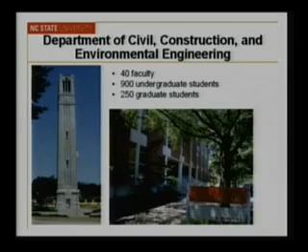I'm going to talk about a specific area of research today, but I just wanted to mention that we're doing a lot of energy and environmental related research that I'm not going to go into detail on today. I might give some examples, however. As Alberto mentioned, I've done a lot of work on measurement and modeling of the activity, fuel use, and emissions of on-road and non-road vehicles using portable emission measurement systems. I've done a lot of work on modeling and evaluation of advanced power generation and environmental control technologies. Of course, one area of current interest there would be mercury emissions. Another, of course, would be carbon capture and what to do with carbon coming out of fossil combustion systems.

I've done a lot of work on quantifying uncertainty in emission inventories. We've been doing work on life cycle inventory and energy mix modeling of various energy systems, including looking at alternative fuels. I've done a lot of work in environmental exposure and risk assessment, and also various systems methods of dealing with variability, uncertainty, sensitivity analysis, and optimization in environmental problems.

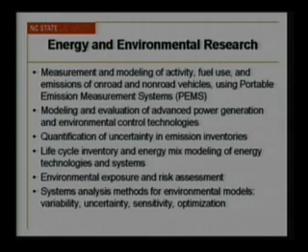Just as an example of some of the field work that we do with portable emission measurement systems, and this will tie into some of what I'll talk about with the best practices for greenhouse gas emission reduction, is to instrument vehicles during actual operations in the real world to measure their activity, their fuel use, and their emissions.

And this is an example where we are instrumenting a bulldozer, and we've tested several bulldozers and lots of other vehicles, with a portable emission measurement system that has gas analyzers and a light scattering particulate analyzer. It draws power from a battery. We instrument the engine to measure things like engine RPM, manifold absolute pressure, intake air temperature, and then that's used to calculate with the exhaust data the fuel and airflow through the engine. We have a GPS receiver to quantify the spatial activity.

And so we've used this for a lot of different kinds of vehicles. We've developed a number of different methodologies for different kinds of vehicles over the last 8 years. And in recent work, we've been looking at biofuels, additives, comparing different engine certification tiers to see how effective they are in the real world, comparing different types of vehicles, and so on.

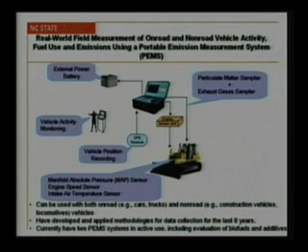Some other research related to that is we've done a lot of work on modeling of real-world vehicle emissions. For example, developing microscale and modal models of emissions to have high resolution in space and time of vehicle fuel use and emissions. And some of these other points I've already mentioned.

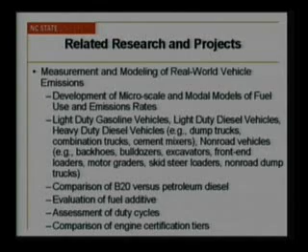Some other work that we're doing, and I'll show some examples of this in the presentation, is we're looking at auxiliary power units for long-haul sleeper cab freight trucks, which is the first bullet here. We're doing a project that's sponsored by the US EPA, but it's in collaboration with Volvo, which has their technical center in Greensboro, North Carolina, to instrument and quantify the activity of a fleet of 20 in-use long-haul sleeper cab trucks to get an idea about the extended idling that occurs with these trucks during driver rest stops.

And these trucks are all equipped with an auxiliary power unit system. And so we're quantifying the way the drivers use those systems. They use shore power. They use the engine for idling to supply hotel services to the cab of the truck. And so I'll mention that as one of the examples of what different practices might be that could reduce greenhouse gas emissions. We're also doing some work that I won't talk much about on the effect of land use on mobile source emissions, but this may be of interest to some of you.

And as I mentioned, we're doing some life cycle inventory modeling to look at sort of the carbon intensity of alternative fuels and the overall emissions of the fuel cycle and the tailpipe emissions for particularly biodiesel, ethanol, and electric vehicles. We're also doing some work to support near roadway air quality studies, looking at how do you estimate emissions at very high temporal and spatial resolution, which is not really part of the capability of the typical emission factor models.

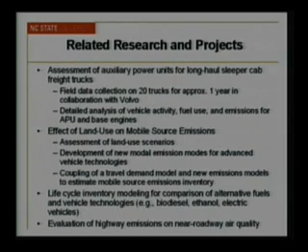Just very briefly, I'll mention another area we do a lot of work in, which is process simulation modeling of power generation systems. And this is an example called the Integrated Environmental Control Model. If you do a web search for that name, you'll find a website where you can download this model. This model is developed primarily at Carnegie Mellon University, where I did my graduate work. And since I've been at NC State, I've continued to contribute some of the components of this model, including the modeling, for example, of gas turbine systems.

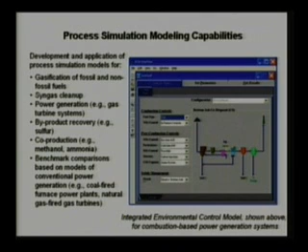And so this has the capability to model a variety of gasification and combustion of fossil as well as some non-fossil fuels, and to look at gas cleanup, byproduct recovery, and some other things. Also in some other work, we've looked at byproduct recovery, co-production, say, of transportation fuels, and various kinds of comparisons. There's also a version of this particular model that deals with carbon capture, and that may be of some interest.

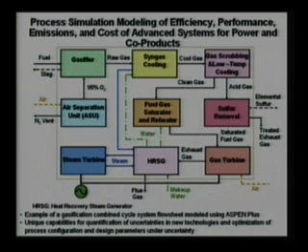This is another type of modeling environment for looking at advanced power generation systems based on gasification. This is a flow diagram of Aspen Plus chemical process simulation model that we use to quantify the performance, emissions, and cost of these types of systems. So we've done a lot of work looking at gasification-based technologies. And of course, gasification can be used with a variety of fuels ranging from coal, but also solid waste, heavy residual waste from refining, and other kinds of waste fuels. So it's a very flexible technique and probably more amenable to carbon capture than combustion systems.

But having said all that, what I'm really going to focus on today is related to greenhouse gas emissions from freight transportation, looking at identifying, characterizing potential best practices. And I want to stress the word potential because I'm not going to repeat that word every time I talk about best practices. But what we've done here is essentially identify almost 60 potential best practices to reduce greenhouse gas emissions in freight transport. And we've done kind of a generic best estimate assessment of each one.

Now, because I do a lot of uncertainty analysis and so on, I'm fully aware that there's a lot of variability in how these practices would perform for particular vehicle owners or fleet owners. And so there would be site-specific issues that would need to be considered in a more detailed assessment. But one of the motivations for this work is that it did not appear that there was any systematic comparison or even listing of these best practices.

And so I think some of the value of this is to have one compilation of these on at least a consistent basis. And as I'll talk about at the end, I think there's some ways this could be refined and improved to make it maybe more amenable to individual users who might want to make decisions at a vehicle level or a fleet level or maybe even a state government level.

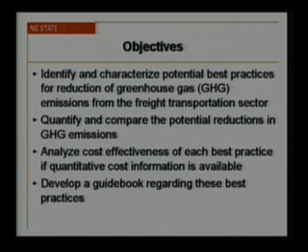Okay, so I'm going to talk about a lot of things. Some of them won't take a lot of time to discuss. So I'm going to define a few key concepts, talk about our overall methodology. I'll give a list of the best practices, and as you can imagine in an hour-long seminar, I'm not going to be able to go into detail on 59 individual best practices.

So I apologize if I don't cover your favorite one in the talk, but there is a report available, and I'll give you the link for that toward the end with more detail. And I'd certainly be glad to have follow-up discussions with anyone who wants to contact me by email for more information.

I'll talk about, on a modal basis, what the potential greenhouse emission reductions might be if these best practices are implemented, perhaps very aggressively, as an upper bound on what we might expect the benefit could be, recognizing that there are all kinds of realities, of the feasibility and logistics of implementing, that would need to be considered in more detail in a second step beyond this assessment.

We'll do some comparison of costs and cost effectiveness of various best practices. And a key point there is some of them will actually save money, and some of them might cost some money but provide a lot of benefit in terms of greenhouse gas reduction. So it's sort of a classic situation of, where would it make sense for a government to step in and provide incentives for things that the market otherwise wouldn't be adopting.

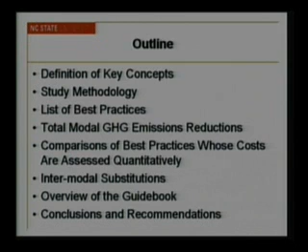Okay, so kind of at the big picture level, if we look at greenhouse gas emissions in the U.S. in terms of tons of carbon dioxide equivalent, the U.S. is emitting on the order of about 8 billion tons of CO2 equivalent per year. And the freight transportation sector is just a little under 10% of that, so on the order of 700 or 800 million tons per year of CO2 equivalent. So it's a non-negligible part of the total, and in an absolute scale, it's a fairly large amount of greenhouse gas emissions.

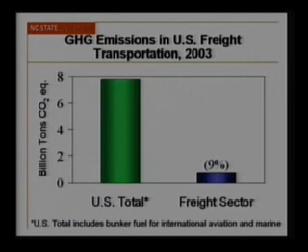And then if we look at how that's distributed among different modes of freight transport, we identified and focused on 5 different modes. The trucking mode is almost 2/3 of that total of the freight-based greenhouse gas emissions.

And I will say we're focusing here on the U.S., and we can get into some detail on how do you deal with some of these emissions that are really based on international transport. But think of it as, we're looking at the U.S. component of any of this that's international in scope. So, for example, for water and air, we're looking at kind of an allocation to the U.S. of what is sort of the U.S.

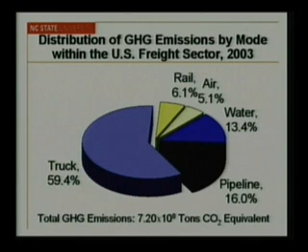share of that. So the pipeline would be the second most important at about 16%, and then waterborne transport, shipping at 13%, and then rail and air roughly comparable, about 12% of the rest of the pie. If we look at what will happen looking forward, our baseline data was for 2003, which at the time was the most recent data that we had available.

And looking at Energy Information Administration predictions about the increase in energy use and allocating that to the freight sector, if we assume that there's no particular effort to apply best practices to improve energy efficiency or reduce greenhouse gas emissions through energy use reductions, we might estimate, and this is basically just a scenario, about a 50% increase in the tons of CO2 equivalent emitted by the freight sector over that time period.

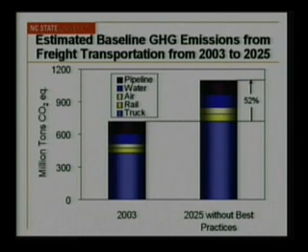And in both of these bar graphs, we show the distribution among trucking and then rail, air, water, and pipeline. So the trucking share, of course, will increase quite substantially, and then other modes will increase as well. But the big piece of this is trucking, and it looks like trucking would be responsible for the largest share of the increase that we might see in the next 15 or 20 years. And of course, that's an estimate. None of us knows what that's really going to look like. But probably it's a reasonable enough assumption.

So now we'll define some terms. We're going to talk about what we call best practices. And these could be technologies. It could be a more efficient engine, or a different fuel, or it could be an operational strategy, like improved air traffic control or improved traffic management that would reduce energy use or greenhouse gas emissions. We looked at both existing or developing best practices. So some of them are commercialized. You could easily implement them. Some of them are concepts that haven't been proven.

The focus, of course, is on reducing greenhouse gas emissions. And for fossil fuel use, that would be closely tied to reducing fuel use. When switching to alternative fuels that have less carbon intensity, then there may or may not be a total reduction in energy use, but the goal would be to have a total reduction in the greenhouse gas emissions. So those might go in different directions.

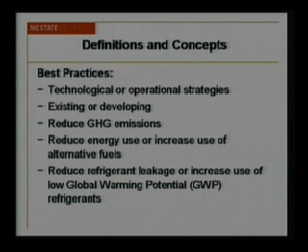Another component of this is to look at refrigerant use in the transportation freight sectors, and to look at either reducing leakage of refrigerants or substituting lower global warming potential refrigerants. And there's a slide I'll show a little bit later that gives some perspective on the relative importance of, say, the CO2 versus refrigerant. The other greenhouse gas that we looked at was methane.

Okay. When we talk about best practices, it becomes evident that, say, for a particular freight mode, such as trucking, there might be multiple best practices that more or less serve the same objective. For the example of long-haul trucks with sleeper cabs, during a rest stop, a driver would like to have either air conditioning or heating in the cab when they're resting. Let's say it's heating, they could obtain that service either from an auxiliary power unit, from shore power, or from a direct-fired heater. And probably they're not going to install all three of those in the same truck.

And so we grouped best practices into subgroups where there were either similar objectives or methods, and where there might be questions about best practices being mutually exclusive, where you wouldn't select all of them within a subgroup. In some other cases, there might be best practices that you could use simultaneously. And so we tried to distinguish that.

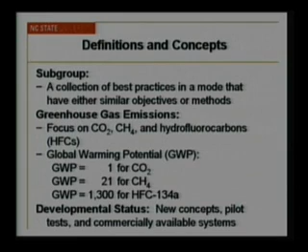Our focus on greenhouse gas emissions is on CO2, methane, and hydrofluorocarbons. These are, in terms of global warming potential, the largest emissions from freight transport. And the global warming potentials are indicated here on the slide. And as I mentioned, we're looking at potential best practices of different developmental status. So it's also useful to keep in mind some of them are easy to implement, and some of them are maybe concepts that need more development and demonstration before they're widely accepted.

Okay, so what we tried to do then is identify potential best practices based on literature review and web review and talking to people, and then assess reasonable maximum reductions that might occur by 2025 in greenhouse gas emissions or energy or refrigerant use if these best practices are implemented, and then to assess the cost savings for these where data are available to support that analysis, and then to consistently report and compare these results.

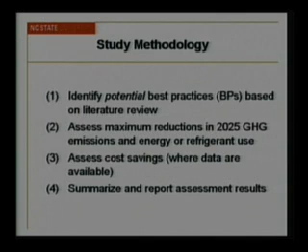So I mentioned that there's a couple of analyses that we do for each best practice. One is looking at what is the potential benefit for an individual vehicle or the basic unit of application of a best practice. So for example, an auxiliary power unit would be applied to one truck. So what is the greenhouse gas emissions per truck without the best practice, and then what are the emissions with the best practice, and then we can assess the per device reduction in fuel use and emissions.

But then we also want to know to what fraction of the total modal activity is that best practice applicable. So for example, for auxiliary power units, this is applicable in the trucking mode, but not all trucks are long-haul sleeper cabs. So only a fraction of the total truck ton miles of freight is carried by sleeper cab trucks. So we want to figure out what fraction of the truck mode could be affected by this best practice.

And then also we need to estimate, well, how much would these be used by, say, 2025? So how extensively would this particular technology penetrate to the on-road fleet? And then based on those estimates, we estimate a modal reduction in greenhouse gas emissions, which is basically the reduction per truck multiplied by the number of trucks to which we think this could apply by 2025.

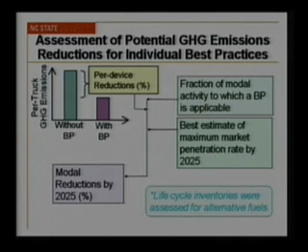Now, for some best practices, let's say we're looking at the use of biofuel, the greenhouse gas reductions may not really be evident at the tailpipe of the vehicle, but they're evident in the fuel cycle. And so we did that analysis based on a life cycle inventory.

Now, I mentioned that some best practices could be applied simultaneously, and others are mutually exclusive. So where we had multiple best practices in a subgroup, let's say aerodynamic drag reduction is a subgroup, and there's many different ways to reduce aerodynamic drag, whether it's on a truck or an airplane. We might be able to do many of those things simultaneously. There isn't really a lot of data or any data to say, well, what's the effect when you do two or more of those things simultaneously?

And so for now, we just made a linear combination of the effectiveness of each of them, recognizing that's probably not correct, but maybe it's an upper bound, and a more accurate assessment might consider interactions among them and maybe give a slightly lower estimate than what we're using. So this could clearly be an area where the estimates could be improved based on more focused work.

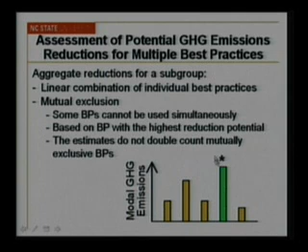In the case of mutually exclusive best practices, such as what I described earlier for shore power and direct heating and auxiliary power, you probably wouldn't use them all simultaneously, or actually the worst case would be to use them all simultaneously, because you could actually increase total energy use and greenhouse gas emissions if one did that. So we picked one of them that had the highest potential reduction to represent that subgroup, and therefore we tried not to double count mutually exclusive ones. So let's say there were 5 alternatives within a subgroup. We would pick the one that offered the most emissions reduction and choose that.

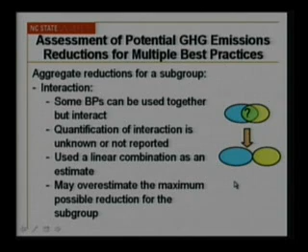Okay, so this is just an illustration of the interaction effect if we had multiple best practices that could be used simultaneously. So let's say they could be used together. I'm trying to get the pointer here. So they could be used together, but they might interact. So what we don't really know is what's the interaction between the two best practices. As an initial guess, we assume we can just sum up their individual effectiveness to come up with a total effectiveness for, say, aerodynamic drag. Okay, so that could be a limitation, and that's something maybe that needs to be looked at more carefully.

We have quantitative estimates of the energy use and emission reduction of all of the best practices that we identified. But what we don't necessarily have are good cost data for each best practice. So if we have cost data, then we did try to quantify the cost of these best practices and their cost effectiveness and their payback time, and we report that in a standardized table that includes cost. If we didn't have cost data, then we just reported performance estimates in what we refer to as a simplified summary table. And these are in the best practice document that you'll be able to get on the web.

Okay, so we looked at a total of 59 best practices. And by the way, this work was developed in a draft form for the U.S. Department of Transportation, and they had an opportunity to go through 2 cycles of review, so we got some feedback from different parts of the U.S. DOT, such as the Federal Aviation Administration, on the air part of what we did, and so on. So this has gone through some review and comment.

So, for example, the truck mode is where there seems to be the most interest and most activity, and of course the most fuel use and greenhouse gas emissions among freight transport. And this is just a list of the subgroups. These are not the individual best practices. So, for example, anti-idling, which I've mentioned, air conditioning system improvement to improve the efficiency or use different refrigerants, aerodynamic drag reduction I mentioned, tire rolling resistance improvement, hybrid propulsion, especially for local delivery or, say, refuse collection vehicles that have a lot of stop-and-go traffic or activity patterns, weight reduction, transmission improvement, engine improvement, reducing accessory load, providing incentives for drivers to use the vehicle more efficiently, alternative fuels.

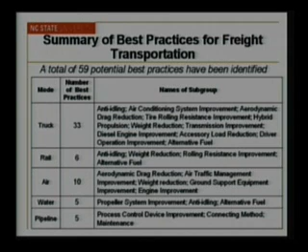Some of the pipeline emissions are associated with control devices, pneumatic systems that use methane as a pressurized gas. And so process control device improvement is one way to reduce some of the bleed or leakage of methane. Methods for connecting to an existing pipeline to reduce emissions during the process of that connection, and then maintenance techniques. So there's a lot of different things here, and this is probably not comprehensive, but it's probably a good start in that it's identifying a lot of different things that at least seem to be discussed in the various freight communities.

All right, so I'm going to just take one example to illustrate some of the issues with analyzing an individual potential best practice. I'm going to use the example of auxiliary power units. This is an example of an anti-idling technique for long-haul sleeper cab diesel trucks. This particular auxiliary power unit is a small diesel engine with a generator that is packaged into a system mounted on the frame rail of a truck, and it provides electricity to run a heating, ventilating and air conditioning system located beneath where the driver would sleep in the sleeper cab of a long-haul truck.

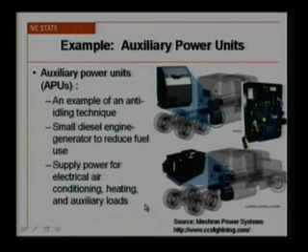And the idea is that when the driver is resting for the hours of service regulation mandated 8 to 10 hour rest period, rather than run the base engine of the truck to provide power for heating or air conditioning, they would run this much smaller diesel engine. And that engine might consume less fuel and therefore produce less greenhouse gas emissions. So that's the basic idea.

Now, if one looks in the literature, goes to the Transportation Research Board annual meeting, and hears what people have to say about this, there's various assumptions that are often made about, well, what is the fuel use of the base engine when it's idling? A lot of people say it's around 0.85 to 1 gallon per hour. What's the usage for the APU when it's running? Some people say that's 0.2 gallons per hour. How many idle hours are there per year per truck? Some people say, well, there's 1,800 hours of extended idling during rest stops for a long-haul truck.

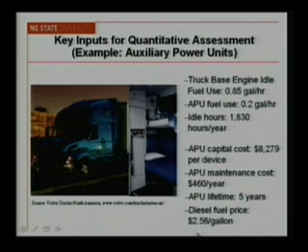And then how much does it cost to have this APU installed on the truck? Maybe about $8,000 to $10,000. How much does it cost to keep it running other than the fuel cost? Maybe about $500 per year. How long does it last? I think maybe we don't really know yet. What's the diesel fuel price? Well, when we did this analysis, it was about $2.56, which obviously is not what it is now.

So then we look at, and this is just an example to illustrate, some of the detail of the estimates. We try to figure out, first of all, which is relatively easy to get at least estimates of, what are the annual ton miles for trucking. So there's about 2 trillion ton miles per year of freight in the U.S. carried by trucks. And then what we had to figure out is how much of that is in sleeper cab trucks. And there's not really data for that, so we had to estimate that.

So we documented our estimate, how we came up with this, but the number we got was maybe it's about 450 billion ton miles per year in the U.S. by sleeper cab long-haul trucks. So if APUs were applied to some amount of market penetration on those trucks, maybe we might reduce 15 million tons of CO2 equivalent per year. And the associated energy use reduction might be about 185 trillion BTUs per year. On a unit basis, we might reduce about 66 times 10 to the minus 3 pounds of CO2 equivalent per ton mile of freight, and about 409 BTUs per ton mile of freight energy reduction.

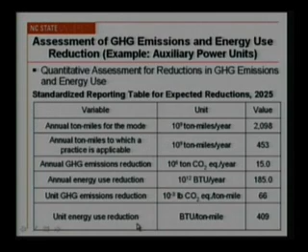Okay, and then in terms of cost, these are some rough numbers for the cost. About $9,000 or $10,000 to buy it, $500 a year to operate. The annualized cost of owning and operating the APU is maybe about $3,000 per year. The energy savings might be a little more than that, so the net savings is about $440 per year.

So why isn't everyone running out and doing this? And some of it is, well, maybe there's other issues, maybe some truckers don't like APUs because they're noisy or they vibrate, or, well, that's nice, but this capital cost is pretty high. So even though there's a $440 savings, if we don't have money just sitting in a bank account, we're not going to just go out and spend this amount of capital to get that amount of net cost savings.

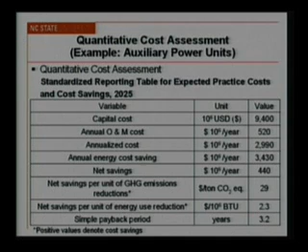So, the sort of implied discount rate for buying this unit may be very high for a typical fleet owner. There's some savings in terms of dollars per ton of CO2 emission reduction, and some net savings in terms of net energy reduction. And the simple payback period here would be about 3 years on this. So, maybe there needs to be some creative financing to give more incentive to use this.

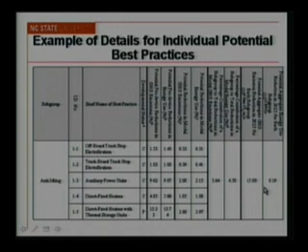Okay, however, that was based on some point estimates of what people talk about. But if you look at the data more closely, in terms of fuel use rate of the base engine that's idling in a long-haul truck. Remember I mentioned that the sort of point estimate that's often used is about 0.85 gallons per hour. Well, Argonne National Lab uses 1 gallon per hour.

There was a national survey of trucks that somehow came up with 1.7 gallons per hour, which I honestly don't think is an accurate number, at least applied to idling relevant to rest stops. And then there's some other data that imply numbers ranging from maybe as low as even 0.3 gallons per hour, which to me seems kind of low, to maybe 0.5.

And so whether APUs are particularly effective at reducing energy use or emissions is going to depend a lot on what the energy use of the base engine is that you're trying to avoid. And that varies perhaps by engine model and by manufacturer and so on.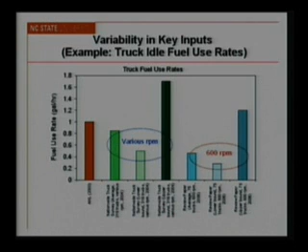All right, then what about the APU itself? And this is an estimate of the fuel use rate of APUs in gallons per hour for a whole bunch of different APUs, or for some of these are the same APU measured by different people. Some of these are vendor-reported numbers. Some of them are measured by independent testing organizations. You see one APU here that's got a very low fuel use rate of 0.05 gallons per hour. A lot of them seem to be around 0.2 gallons per hour.

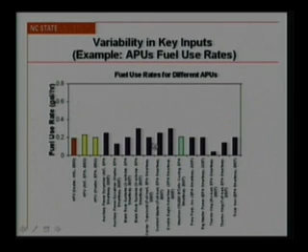But what's not clear in a lot of these cases is whether this is loaded. Is this really producing enough electricity to power an air conditioner, or is this the APU idling without any load? Some of these tests were loaded, some of them were unloaded, some of them we don't know. So there's a lot of variability in these numbers too.

So we've been doing a different project, not related to this greenhouse gas guidebook, but a separate activity to look at idle reduction technologies and to look at the activity pattern of freight trucks in the real world and how do they idle and what do they do when they're idling. And as part of this work, we're collaborating with Volvo, and Volvo has instrumented 20 trucks that they have sold to a couple of different customers in about the last 1 or 2 years.

And we're going to just refer to one set of trucks as Fleet A. These are all owned by one fleet. The other is Fleet B, owned by a different fleet. And each fleet has 5 trucks with one type of APU and then 5 trucks with a second type of APU. We'll just call them A and B. So we have 4 strata of 2 different fleets and 2 different types of APUs.

And these trucks are instrumented. Volvo already has the capability, as many truck companies do, to report electronic control unit data through a satellite-based system or a cell phone-based system. And that's often done for fleet owners to monitor what their drivers are doing or to track the maintenance of a truck. But in addition, there are a number of additional sensors that were installed to instrument the APU itself and to measure temperature inside and outside of the vehicle and so on.

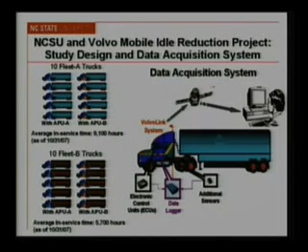And there's an additional data logger that's connected into this satellite-based system for transmitting data. So every 6 hours we get a report from each of these 20 trucks; some of the data are reported every 15 minutes, but then they're stored and uploaded every 6 hours. So we have very detailed activity data for these trucks.

So just as an example, let's say we were looking at the amount of idling that's reported by the electronic control unit. And here we'll include idling of the base engine plus the hours of APU usage. And we'll say that for a given truck represents the total amount of idling. And we have here examples for 2 different trucks. So for truck 1, that totaled about 1,800 hours per year. That's kind of like that estimate I talked about a little while ago. For truck 2, it's about 2,200 hours per year of just total reported idling.

However, some of that idling occurs over short periods of time just in traffic. So if we exclude the idling that was less than 15 minutes, and 15 minutes or more, for lack of better terms, we'll call long duration idling. Well, that's only about maybe 1,200 or 1,300 hours for truck 1, not 1,800 hours. And likewise, truck 2's long duration idling is about 26% less than the total reported idling. And then let's say we just pick a criteria, let's say we want to know how much idling had a duration of 6 hours or more.

Well, that's only about 800 hours for truck 1 and maybe 1,400 hours for truck 2. So it's probably not the case that there's 1,800 hours per year per truck of rest stop idling, and rest stops should actually be longer than 6 hours. One thing we're also seeing is, drivers may or may not be taking the full 10-hour rest stop, but that's another issue to talk about maybe in a different forum.

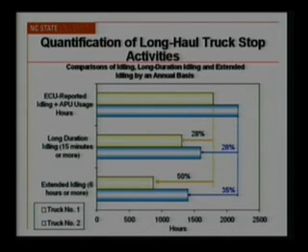This is some work that we've done to measure the fuel use and emissions of the base engine of a truck and the APU engines. And for the particular truck we looked at, its fuel use rate was only about 0.5 to 0.6 gallons per hour, depending on ambient temperature, which is a surrogate for whether it's using air conditioning or heating. And we did some measurements to quantify the emission rate of different pollutants, including CO2, at different rates of fuel use. So this is gram per hour NOx emissions, kilogram per hour CO2 emissions.

And then for the two different APU engines, one thing you might notice is the APU engines at high load might consume as much fuel as the base engine does at low load. So the differential in fuel consumption might be on the order of 1/10 of a gallon per hour, maybe a little more than that in some cases. So here there's some modest fuel use benefits.

We just highlighted a couple of columns to illustrate, there are substantial reductions in the NOx emissions for the small APU engine compared to the base engine, and also in the CO2, of course, proportional to the fuel use. And one can get into all the other pollutants, but in the interest of time, I won't go into a lot more detail on this.

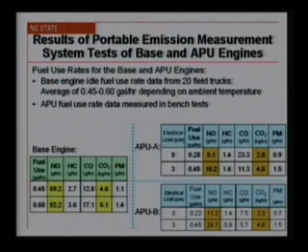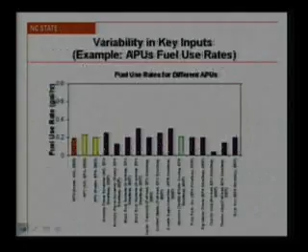So some of it's behavioral. Why is it some drivers don't like the APU? Why won't they use it more? Or should there be incentives to get them to use it more? Okay. So that's just to give a little bit of flavor of...

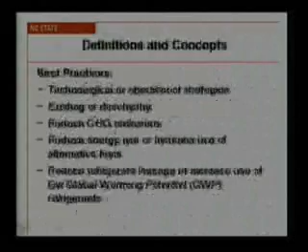Let's see, I think I'm going in the wrong direction here. Okay, I don't know what I did there. Somehow I switched this so it only goes backwards. All right. Let's go forwards.

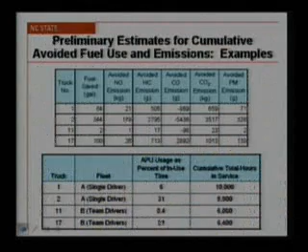Okay, here we go. All right, so the main point is, there's a lot of detail here, but site-specific variability could be quite important in an individual owner's decision to adopt a technology such as this. So the actual fuel savings, emission reduction, and so on can be highly variable. So the results here in our best practice study are meant to be kind of typical numbers, but they're not necessarily site-specific values.

And so therefore we think a next step in this work would be to develop a tool to identify, compare, and evaluate best practices using data relevant to an individual decision maker who's interested in adopting these best practices. And their decision might not be the same as someone else's decision because they have different situations.

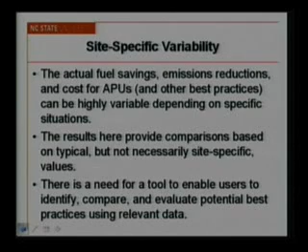Okay, I'll talk about another example looking at life cycle inventory and real-world tailpipe emissions for soy-based B20 versus petroleum diesel. And of course, here we have to look at the life cycle to understand the carbon intensity of the fuels. And there's also some geospatial implications of using biofuel that I'll mention. And then the real-world implications for tailpipe emissions. And we've done some in-use measurement of 35 different diesel engines on different types of vehicles, including both on-road and non-road vehicles.

Before I move on to the next slide, for those of you who have looked into B20 biodiesel, for example, there's a fairly well-known report by the US EPA based on summarizing engine dynamometer data that indicates that you'll have 10 to 20% reductions in pollutants such as CO, hydrocarbon, and particulate matter, but you might see a little bit of an increase in NOx emissions, maybe 2%.

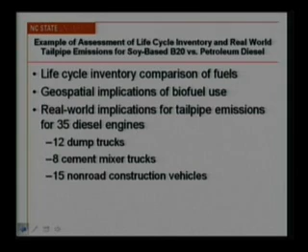And a lot of policymakers and fleet owners and so on have looked at that increase in NOx emissions, and they're in a non-attainment area for the National Ambient Air Quality Standard for ozone, and they're thinking, well, we just can't do that. And so there's been some hesitance to use biofuel for that reason. And there are some other reasons as well, but that's one of them. So we've done some in-use measurement to try to understand what's happening in the real world, and I'll talk a little bit about that.

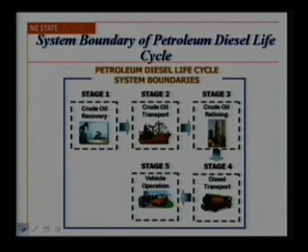So for the life cycle, we need to have a system boundary for the petroleum diesel life cycle to quantify what are the CO2 emissions and other emissions associated with producing diesel fuel from crude oil recovery through delivery to the vehicle, and then also for the biodiesel life cycle. And some of the main differences are that, of course, we have farming, we have a soybean oil plant, then there's some transport to a biodiesel plant for further processing, and then there's transport to the vehicle where it's used at the end.

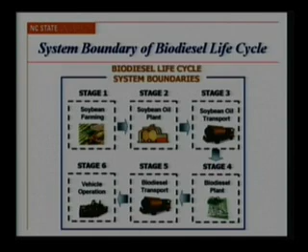And in the analysis I'll give you some numbers for, we're more or less assuming that there's an existing soybean farm, that we're not clearing a forest to create a new farm. And if you were to, say, deforest to create new farmland, then that would affect the CO2 intensity of this alternative fuel.

All right, so under those assumptions, if we look at the energy, for example, the energy associated with fossil fuel and renewable fuel to make petroleum diesel, there's very little biofuel because right now we don't use a lot of biodiesel in the U.S. So there's a little bit of biodiesel that might be used to transport, and so there's a very tiny amount. So let's say petroleum diesel is essentially all fossil fuel, and so you have a lot of CO2 emissions as a result.

For B20, there's an increase in the total amount of energy to produce a gallon of B20, but only 83% of that is fossil-based, and the reduction in the fossil energy use compared to petroleum diesel is about 9%. Now that could depend on specific situations of that life cycle. And even for B100, under the current energy mix in the U.S., there's a lot of fossil transportation fuel that would be used to deliver this fuel. So maybe there's about a 45% reduction in the fossil intensity of B100 compared to petroleum diesel.

Now, if we went to an energy mix that was more heavily biofuel-oriented, then these percentages could increase. And on the other hand, if we were clearing forested land to do farming to create these biofuels, these percentages could go down.

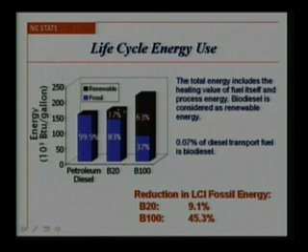All right, now this is a fairly complicated assessment. I haven't given you all the background on this, but basically, just to give you an idea, we've done some different scenario analyses, and let me focus on NOx as an example, where we looked at the fuel cycle emissions and also the tailpipe emissions associated with making petroleum diesel. And of course, the tailpipe emissions are quite dominant if you're using petroleum fuel, but there are some NOx emissions associated with producing the fuel. And then this is an uncertainty range in the total emission estimate for this life cycle.

If we make a soy-based biofuel with a new soy oil plant that is compliant with the most recent new source performance standard that applies to that kind of stationary source, but if we assume EPA's dynamometer data as the basis for the emission factors, we would estimate a slight increase in both the tailpipe NOx emissions and the total NOx emissions. However, if we use some in-use emission factors, which I'll talk about in a minute, that indicate perhaps a slight reduction in NOx tailpipe emissions, then there might be a slight net reduction in NOx emissions.

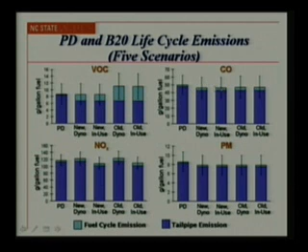So if we look at some other pollutants here, for VOC, we would expect that for a new soy oil plant, maybe there's not much net change in the total life cycle emissions. If we use an old soy oil plant, which tends to have higher VOC emissions, then we would have an increase. So in terms of the benefits or disbenefits for other pollutants, it kind of depends on what technology is used for the processing of the soy-based fuel, and then what are the real-world emissions of these. For CO, it looks like there's a slight net reduction in life cycle emissions, as seems to be the case for particulate matter.

So there's a question of, if we're using biofuel in a non-attainment area, are we going to have lower NOx emissions as well as lower CO, hydrocarbon, PM emissions? And then if we're producing the biofuel in a non-attainment area, then the whole life cycle might be occurring in that same location, and that could change the comparison in some cases. Or you might have a situation where you have benefits of lower tailpipe emissions in a non-attainment area, but you have maybe some disbenefits of higher emissions for the fuel cycle occurring in a rural area.

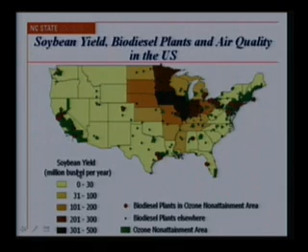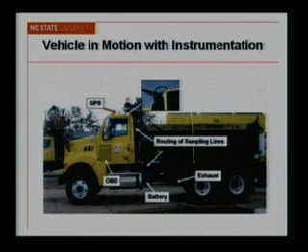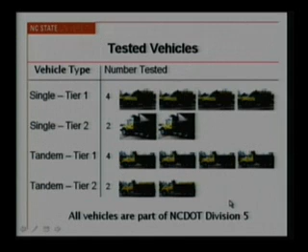All right, so another aspect of this is to try to understand what are the emissions in the real world for these vehicles, and we've done some measurements of different kinds of vehicles, for example, dump trucks. We've done an in-use measurement of 12 different dump trucks that represent different chassis sizes and different engine certification tiers. So we have single rear axle dump trucks, which weigh about 33,000 pounds gross vehicle weight, and then double rear axle, or tandem dump trucks, at about 50,000 pounds gross vehicle weight. This is a study we did for the North Carolina DOT, where we measured these vehicles as they were operating throughout Wake County in North Carolina. We've given presentations on this before, so I'm not going to go into detail, but I can point you to more detail if you're interested.

Kind of the bottom line is, if we look at an average over unloaded and loaded operation of these dump trucks, these are the percentage changes in fuel use and emissions. The 7% increase in fuel use is slightly influenced by one vehicle that was towing a trailer during one of the tests. If we exclude that vehicle, the percentage change in fuel use was more like 1 or 2%, which is what we would expect given the properties of biofuel versus petroleum diesel.

But what we found was there was about a 10% reduction in nitric oxide emissions, which constitute about 95% of the total NOx emissions from diesel engines. Comparing that to the engine dynamometer database that EPA put together, from which they estimate a 2% increase, that's quite a difference. On the other hand, the percentage changes that we observed in hydrocarbon, CO, and PM emission rates were very similar to the percentage differences based on EPA's database.

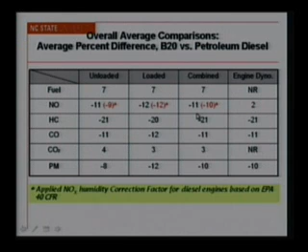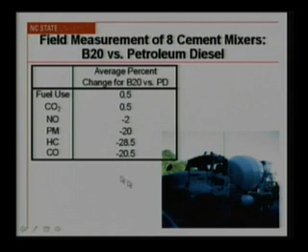So then there's a question, well, why would there be a reduction in NOx emissions, and is that even a real thing? Maybe this is some artifact. And so we've also done some measurements on some cement mixers, and this is the average of 8 different vehicle tests. Here we saw a small decrease in NOx emissions, and actually more substantial reductions in emissions of some other pollutants.

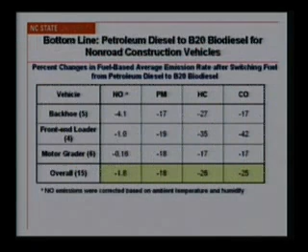And then we've also done some testing on non-road vehicles, and I won't go through all the procedure that's shown here, but we've tested backhoes, front-end loaders, and motor graders and looked at the percentage change in NOx emissions as well as PM, hydrocarbon, and CO. And the average over 15 vehicles was a slight decrease in the NOx emissions and also substantial reductions in emissions of other pollutants.

So, biofuel may offer some advantages in terms of reducing carbon intensity, but then, sort of one of the potential showstoppers has been what's it going to do to NOx emissions. And looking over all of the 35 engines we've tested, it seems like there's, on average, a reduction in the NOx emissions, not an increase.

Now, why is that? Well, one reason may be, and this is not just our opinion, but some others are also of this opinion, that if the biofuel is made from a B100 blend stock that's compliant with the ASTM standard for B100, that seems to be associated with situations where we're seeing these kinds of reductions. So all of the tests we've done are with fuels that, as we understand, meet that standard for the B100 blend stock.

There have been some other tests with fuels that the tester knew did not meet that standard where the NOx emissions have been higher. So the fuel quality may be one key issue. Another issue could be that we're looking at real-world duty cycles and not a standardized engine dynamometer test schedule.

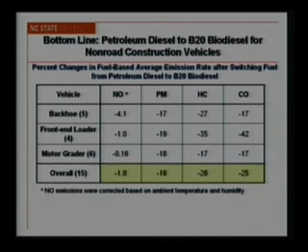Okay, so again, you could go into a lot of detail on any of these best practices. So I've kind of picked 2 examples to go into detail on. But let me come back to the big picture of looking at, all right, well, suppose we use all of these 59 best practices, and what might the benefit be? And is that potential benefit substantially large, that we ought to look at this more?

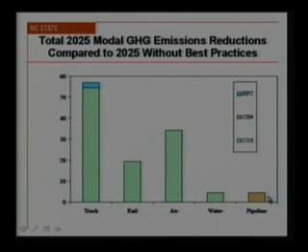If we look at the allocation among greenhouse gases that we considered, for the truck mode, it's mostly CO2 related to energy use reductions or alternative fuels, and a very small amount related to reducing refrigerant leakage or substituting lower global warming potential refrigerants. For rail, air, and water, it's really all based on CO2. And then for the pipeline, it's really all based on reducing methane discharges from the pipeline system.

Now, this is a similar perspective looking at 2025 with and without the best practices, but looking at the magnitude of the reduction in million tons of CO2 per year. So, for example, for trucks, for commercially available systems, maybe we might see 175 million tons of CO2 equivalent reduction with that set of best practices. Then if you could implement the pilot test, that gets you over 250. And if on top of that you implement new concepts, that gets you over 400. So that's a fairly substantial reduction.

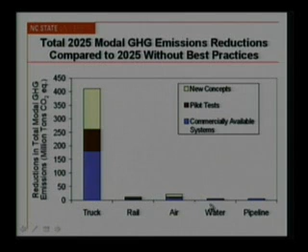And then the magnitude of reductions from these other modes is quite a bit less. Rail, air, water, pipeline. In part because these contribute less to the total freight greenhouse gas emissions, and in part because the percentage reductions estimated for these are smaller than for the truck mode.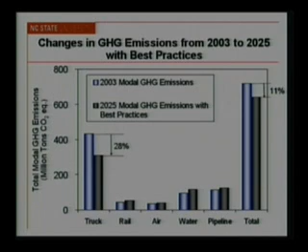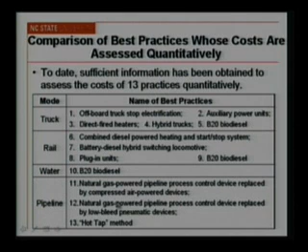Okay, now we did look at the cost of some of these technologies. There were only 13 of them where we thought we could get good cost data. And so we have 5 for the truck mode, including various anti-idling techniques, hybrid trucks, and biodiesel. And then for rail, we had basically anti-idling types of techniques, hybrid switching locomotives, plug-in systems for anti-idling, and biodiesel. And then biodiesel for marine applications, and then various systems aimed at reducing leakage of methane from pipelines. So I'll just focus on the truck modes as examples.

So this is displaying, if I can get the pointer back, here it is, the greenhouse gas emission reductions in million tons of CO2 equivalent per year that might be attributed to these individual potential best practices. And if we look at kind of the 2 big ones here, it's the hybrid trucks, which might provide benefit in stop and go types of duty cycles, and then the B20 biodiesel, which could possibly provide benefits for any truck. So those might offer the largest individual magnitudes of emission reductions.

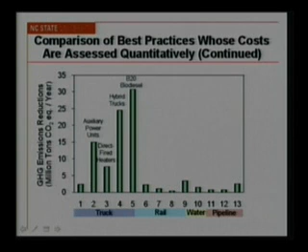And then if we look at the net cost savings, and I'll just focus on those 2 again, hybrid trucks will cost more money, of course, but they will use less fuel. And depending on the fuel cost, you might actually have a substantial savings.

And by the way, this is just an anecdote, nothing to do with freight, but I was in San Antonio about a month ago, and a lot of the taxis are hybrids. And I was talking to the taxi driver, because we were in a hybrid Camry, and he was saying he saves a tremendous amount of money in fuel. So for him, the payback period on buying a hybrid is very short. So where you have very high mileage vehicles, there might be tremendous benefits from that. But again, with any new technology, a user wants to make sure it's going to last before they're going to spend money to adopt it.

The B20 biodiesel, although it had that large reduction in emissions potentially, there's a fuel cost premium for this, at least now. So it costs more money. And so if a fleet owner is going to use it, maybe a state government might use it, like North Carolina, where they're using it to comply with the Energy Policy Act. But a private owner, why would they use it? Maybe they use it because they want to be a good citizen, but it's going to cost them more money. So what's the incentive?

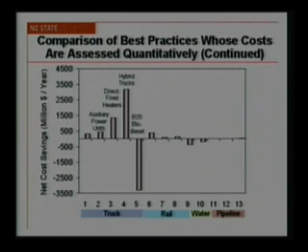Okay, another perspective, and this is, I think, an interesting comparison, and it's obviously a very simplified comparison, and hopefully not. I don't want to present it in an overly naive way, but if we look at the intensity of greenhouse gas emissions among different freight transportation modes, and we compare, this is pounds of CO2 equivalent per ton mile, and we compare truck, rail, air, water, pipeline.

Well, we're not surprised that air is the most energy intensive per ton of freight transported per mile of transport. But generally, if we're using air, it's to send a FedEx package somewhere. It's not that we're going to transport a gas turbine engine through an airplane to a customer. So there's a certain market niche for air freight that maybe is not comparable to some of these other markets.

But probably the ones that might tend to capture your attention would be truck versus rail, or truck versus water if you're living near the Mississippi River, for example, or in a coastal area. And this suggests that, well, if we could encourage where it makes sense for a ton of freight to be transported by rail instead of truck, or by water instead of truck, that would have huge benefits, larger than any of the benefits we've been talking about for implementing a best practice within a particular mode.

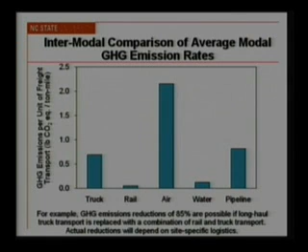But the actual reductions would depend on site logistics, and so I wouldn't expect that you could get an 85% reduction overall, and maybe it's only 1% or 2 or 3%. So I think this is an area where it'd be interesting to do some more work to understand what that potential benefit could be.

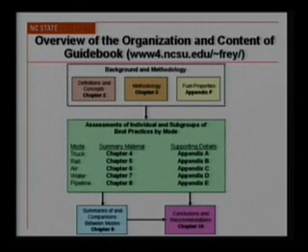The report has background and methodology in chapters 2 and 3, and then we go through fuel properties in an appendix. And then we have a series of chapters on each of the different modes that gives kind of the bottom line results and a little bit of description of each best practice. And then we have supporting appendices that give the details of all the assumptions and estimates that we made where there wasn't data that we could directly look up. And then there's summaries of and comparisons between modes in Chapter 9, and then conclusions and recommendations in Chapter 10. So there's a lot more detail in that report. It's a several hundred-page report.

Okay, so in terms of conclusions, well, there could be lots of different conclusions. One might be, well, if you could aggressively implement best practices, then you might see a net decrease in total greenhouse gas emissions in freight transport. And I'm sure if you're a government agency, that's exciting. If you're at a shipping company looking at this on the web, you're probably really nervous about this statement.

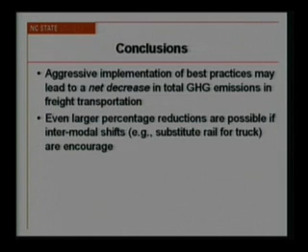So again, this might be a sort of upper bound benefit that might accrue. And I think there's a need for more detailed analysis to quantify this more accurately, or to look at it on a more site-specific basis. I'm sorry, let me go back. And then even larger percent reductions might be possible per ton mile if you could shift between modes. So how do you encourage that? How could you create incentives for that, and how effective would that be?

Okay, some other conclusions. Right now, it's really difficult to assess the cost of a lot of these. There just isn't really good data, and that would be another area where there could be more information collected more systematically than we were able to do with the resources we had. But where we did have cost data, it's clear that there's a lot of variability in the cost effectiveness and the payback period of different technologies. And a lot of the cost savings depends on the magnitude of energy reduction.

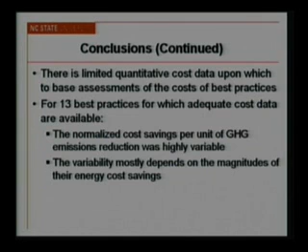But even in cases where there's a net savings, that net savings by itself may not be enough incentive for people to adopt these best practices. So there needs to be some effort to figure out how to promote the diffusion of these. And some of it is demonstrating, especially the pilot and commercial scale techniques, so that in the commercial marketplace they're viewed as proven technologies. And some of it may be dealing with nuisance issues with some of these, things like the vibration I mentioned with an APU, which may be an issue for some people.

Okay, so then, some best practices may offer potential for large reductions in greenhouse gas emissions, but maybe they're not cost effective. So these might be the ones that you really would like to promote, but no one's going to adopt them unless there's an economic incentive to do it, or I guess unless they're told to do it. Maybe there are ways to reduce the cost of these alternative fuels to make them more attractive, for example. So, from a national policy perspective, this might be a classic case where a government should promote some research, development and demonstration to promote the greater good of reducing national or state greenhouse gas emissions.

So it's clear that some best practices potentially could lead to some no regrets outcomes. There's net savings to the operator. There's reduced greenhouse gas emissions. Maybe some of it's just a need for more education and dissemination of information and networking to convince people that they'll do well with these. And others, as I say, may have to overcome some perceived or real nuisance type issues or some cost issues.

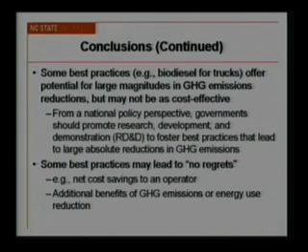Okay, in terms of other related work, I've mentioned that we've been doing a lot of work looking at B20 versus petroleum diesel. We're also doing some work looking at a plug-in diesel hybrid school bus. There's about 19 of these prototype hybrid school buses around the country, and one of them is in Wake County where we're located. So we've done some measurement. We don't yet have the results to present, but we're currently analyzing data from this bus.

There's some other hybrid utility vehicles that are being used by Progress Energy and some of the electric utilities that are really now getting into promoting plug-in hybrid vehicles. And I'm hoping we might have an opportunity to do some measurements on those types of vehicles. We're also planning to do some testing on passenger locomotives. The state of North Carolina operates a train from Raleigh to Charlotte, and they're interested in switching to biodiesel and also retrofitting with some emission reduction technologies. I've mentioned some of these other areas already, so I won't go into detail.

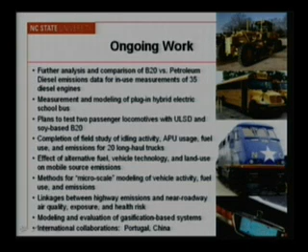We're also doing some international collaborations. This is a photograph of, you probably can't see this, but this is a Honda. It's a Guangzhou Honda. It's made in Guangzhou, China. So this is a Chinese license plate. You think about greenhouse gases and how many of these Hondas and Toyotas and Buicks and so on are being used in China. CO2 doesn't really care whether it came from China or California or North Carolina. So we may want to engage in trying to figure out how to assist in promoting technologies for use in other countries to try to mitigate greenhouse gas emissions.

So in terms of some recommendations, I think this best practice document that we've developed is probably out of date as soon as it's published. It's the kind of thing where you have to continually update it as new information becomes available, revise and develop cost estimates as new data become available, and further evaluate the key assumptions that influence the selection of best practices through a more extensive sensitivity or uncertainty analysis.

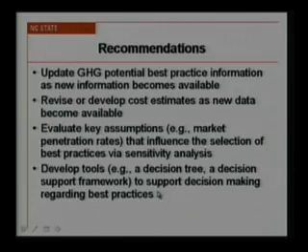And we also think it would be nice to develop a computer-based decision tool like a decision tree or a decision support framework where an individual user could put in their own site-specific data, like here's my fuel cost, here's what I think it costs to get these technologies. And then it could rank all of these best practices for that individual user, and that ranking might be different than for a different user. That's something we'd certainly be interested in working on if we had resources to do that.

So I should mention this work's been supported by a lot of different sponsors, none of whom are responsible for what I've said here today.

And I also want to acknowledge a number of my students. Po Yao Kuo actually did a lot of this greenhouse gas best practice guidance document work. And Kang-Woo Kim and Shi-Hao Pong have done a lot of the in-use measurement work. Haibo Zhai is doing a lot of microscale emission modeling work.

And Phil Lewis is a PhD student also who's done a lot of in-use measurement. William Rasdorf is a faculty colleague, who's done a lot of construction vehicle work with me. And Charles Villa is with Volvo, who's done a lot of the instrumentation of the in-use fleet of long-haul trucks.